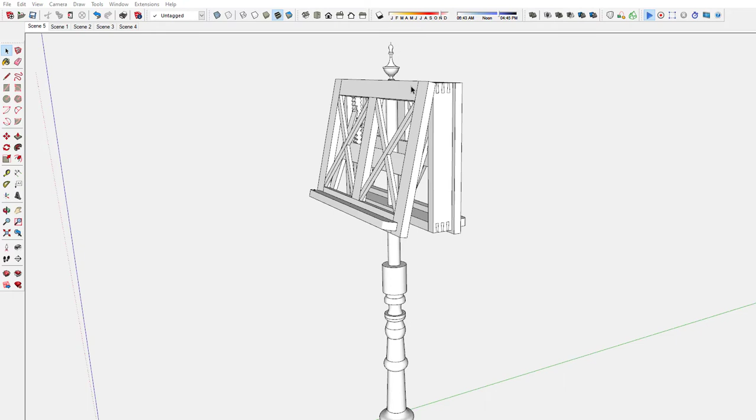The difficult part was up here. This is a double music stand, so both sides can be used simultaneously, and they have an adjustment for the angle, and this was the most difficult part to figure out how to do it.

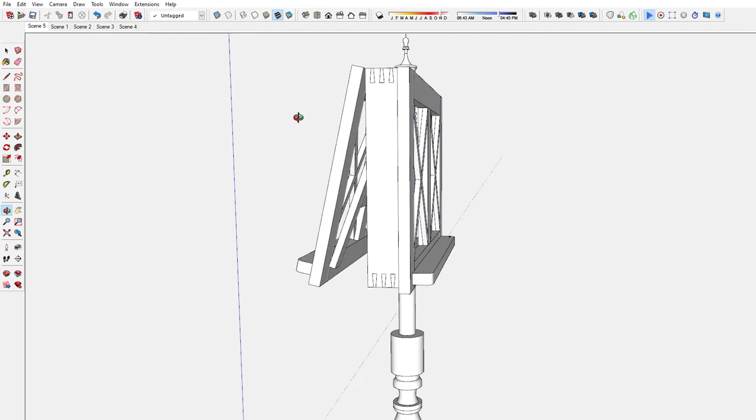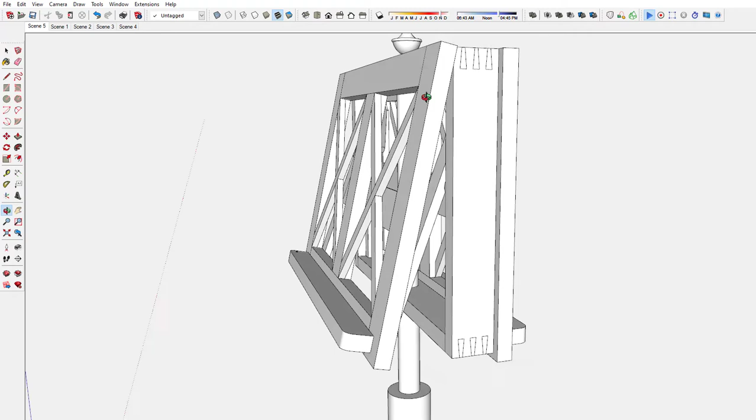There is this hinged music holder part that is hinged up here at the top on this frame, this dovetailed frame, and also is an arm assembly in here that is hinged down at this location here,

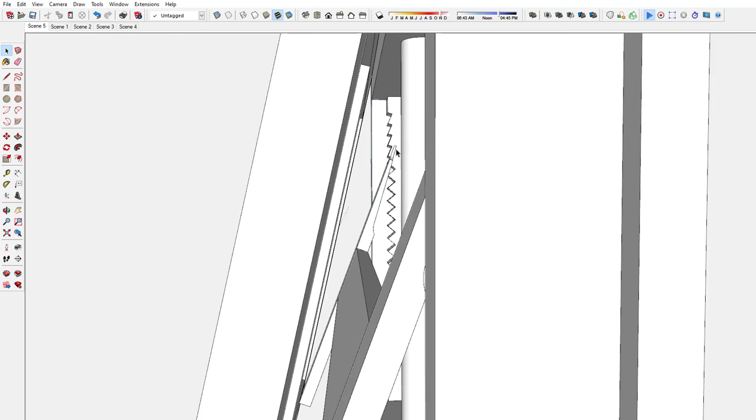and that arm connects in with some ratchet teeth that are located in this middle frame structure. So what I've done is to try to create an animation of this movement of adjustment.

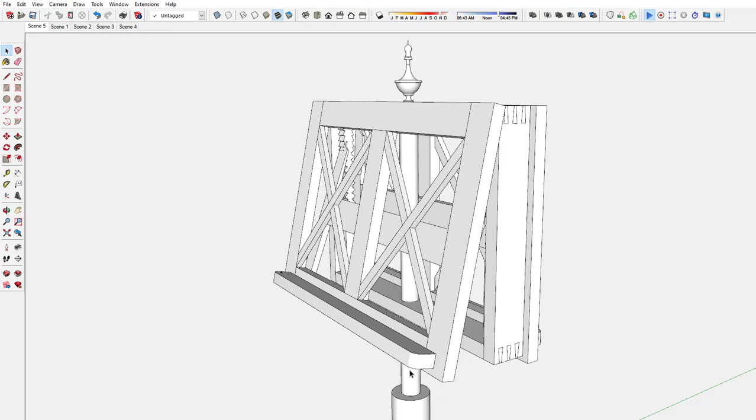Also, this can be rotated around this pole in the center. But let me go back to this start position here and then view the animation, and I can pick play,

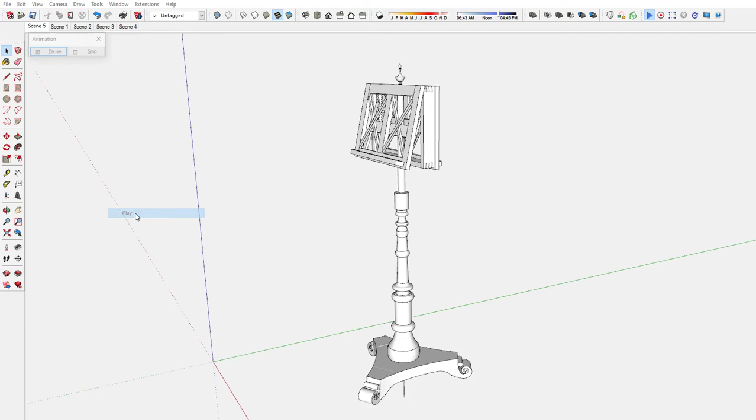and we should see some movement here of these hinged parts, and then the intersection of that arm into the teeth, the ratchet teeth. I'm only opening one side here. The other side has the same arm and music holder and would work the same way.